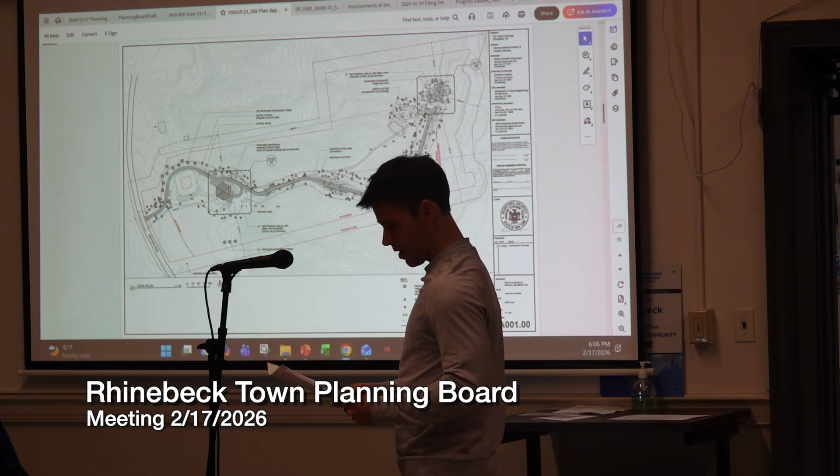So the well's already been drilled, and it provides a very significant amount of water, so we're good there. The back of the property — this is the well, yeah, there's the well.

We're proposing an accessory dwelling unit at the rear portion of the property, close to the Landsman Kill, which borders the east side of the property. It's a New York State DEC Class C stream. There's a 100-foot conservation easement from the bank, and all disturbance and construction is staying completely outside of that easement. We're getting pretty close to it. The point is there's a waterfall in the stream that we're kind of capturing the views with, that's the intention.

So we've already submitted a letter from a structural engineer verifying that the existing foundation was good. So we looked at that. Just looking at what else.

So the project complies with maximum allowable coverage. We do have to get a variance from the ZBA for the size of the accessory dwelling unit. We've already met with them. It was pretty positive. Public hearing is tomorrow, I believe. So that is in the works.

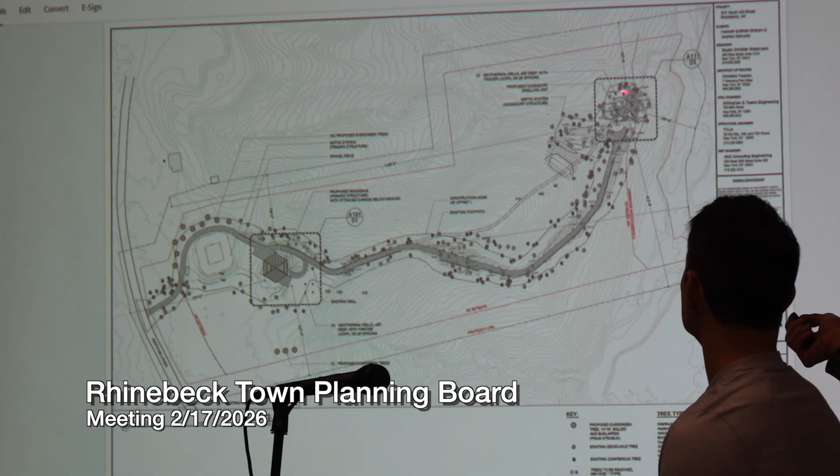The site is staked out now. I think they're going to take a look. I refreshed the flags. Most of the sticks from last summer were still in it, but I put some more yellow ribbons so it's more visible. I have photos also in case you want those.

There's a pretty visible ledge actually, like almost like a little cliff. So we're above that cliff, which is also the 100-foot setback, and so we're 3 foot 9 inches further back from that, from the 100-foot setback. From the easement.

This parcel was created as a filed map, and as such, there was a driveway shown on that map, which is where the existing driveway is. We're going to meet with the county DPW, though, just to make sure everything's good. We already discussed with him, we just can't get out there with this weather.

So getting the driveway back, there's a driveway from basically the primary dwelling back to where the accessory dwelling is. There's some steep slopes there. The majority of it is about 10%.

There's a driveway profile that was submitted. There is a section about 100 feet where it approaches 15%. It's 14.7. But we're proposing, so we'd like to keep it gravel for aesthetic purposes, but we're proposing the geocell stabilization.

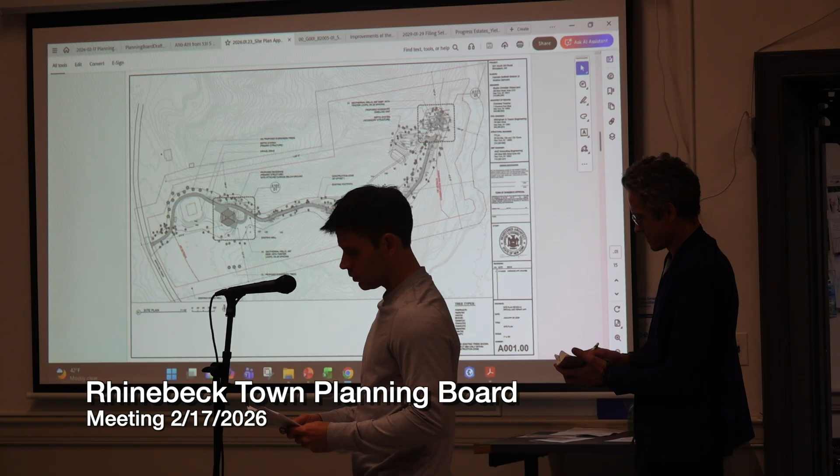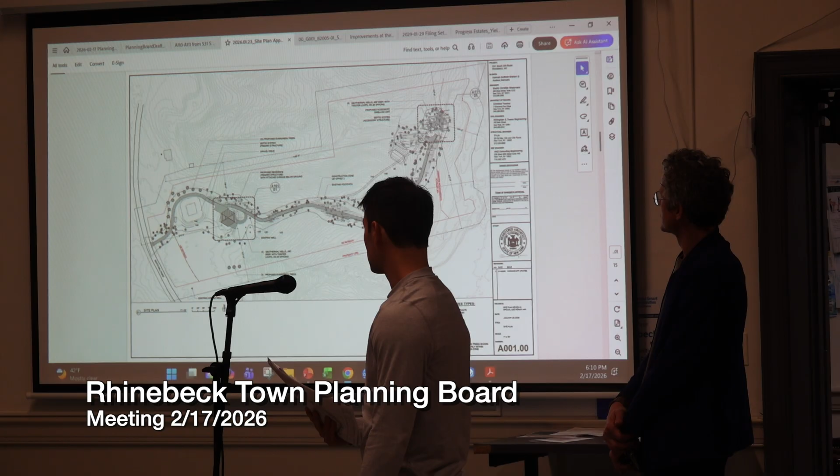There's more information in the civil plans. We're going to try to keep all the road adjacent ditches vegetated as much as possible, just to allow natural infiltration into the ground. The fire inspector has taken a look at the plan, and he was okay with it. So we've got email correspondence. I think that was included.

Was it the fire inspector or the fire department? I think it was the fire inspector. I'd have to look at who it came from.

Where was I? So the primary structure is over 300 feet from the public right-of-way, 140 feet from the boundary line to the north. Most of the tree clearing was already done when the original home was built for the front portion. We did conduct a tree survey within 20 feet of the limits of disturbance, so we could wiggle it around if we needed to avoid any specimen trees.

This plan and another plan does show tree removal. There's actually a lot of dead trees that are being removed. If you look, all the trees are labeled with their diameters.

And we're proposing new ones. We're proposing some additional landscaping just to kind of buffer what's already there. So the ADU certainly won't be visible by anyone. It's about 1,300 feet from the public right of way. It's pretty well screened.

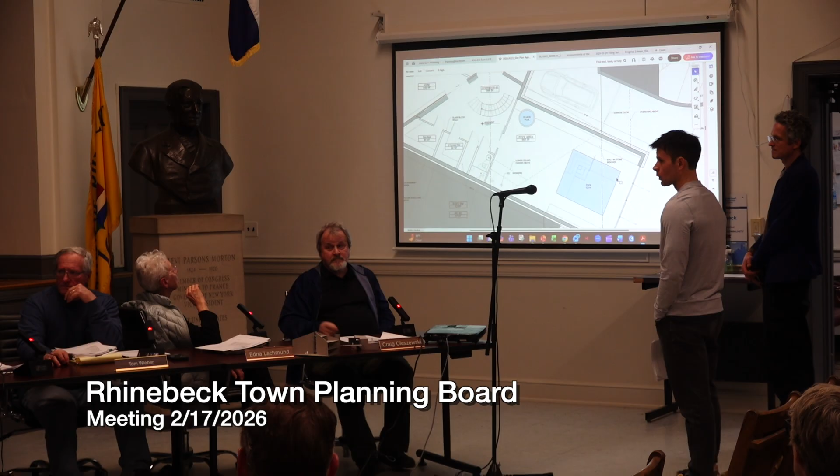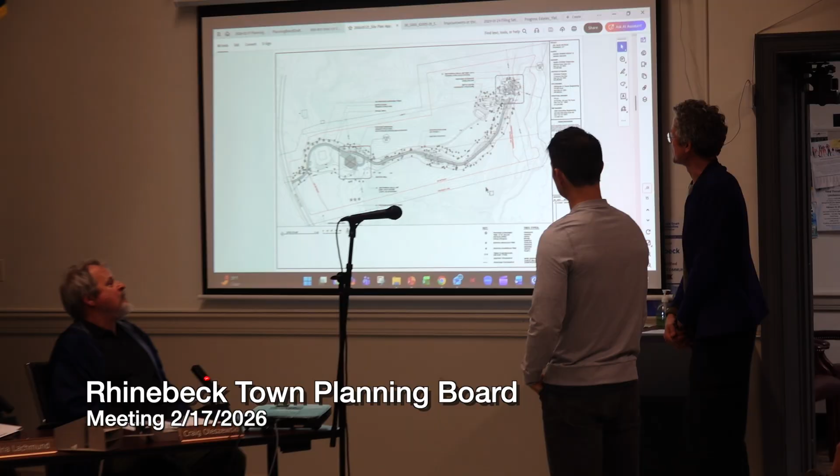Plus the primary bedroom is in the accessory dwelling. Yep, so presumably they will take a car from time to time to get there, every once in a while, yes. When we started walking the land, we were actually talking about just using this path, but then we knew we needed to make a road that's drivable for a fire truck. And the accessory structure is just bedrooms, bathroom, and like a living space?

A little kitchenette, yes, upstairs. So in what here looks like a pavilion, there's a kitchen facing the waterfall, and a built-in table, and then the roof deck is accessible. Actually, this addition to the building will house the bathrooms.

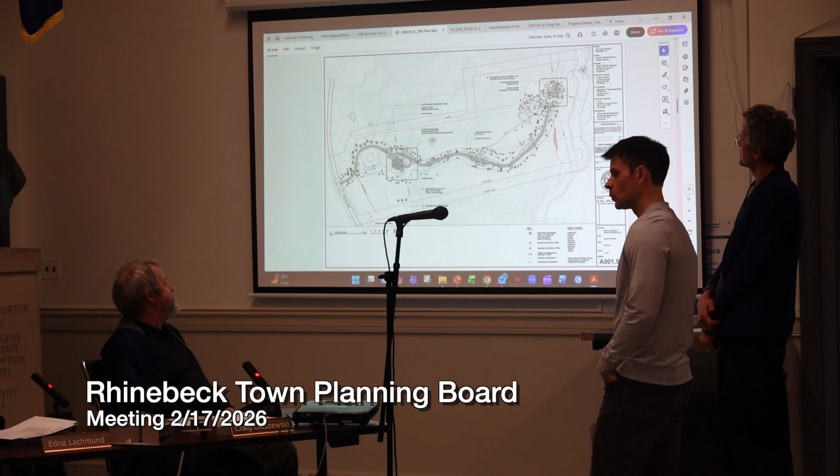Since this is in the landmark district, we'll be requiring a phase 1A and 1B archaeology. It may have been done for the original house design, we should check into that, but it certainly was not done for the roadway or the accessory dwelling. As that gets closer to the Landsman Kill, which is a very sensitive site, which is why Scenic Hudson has it, we'll especially want to have a concentration on archaeology in that area.

Would you agree, Craig? I do, yeah. That's a good point.

Anything else? You mentioned that the accessory dwelling is close to the edge of the ledge. Do you anticipate any difficulties during construction? How will you keep debris from falling down that ledge? We're set back 3 foot 9 inches from the actual ledge, which coincides with the setback, the conservation easement. So those 3 foot 9, we're pretty sure we can stay within it, because we don't do much excavation. We're pretty much on bedrock, so the footing will go directly on bedrock. It's a slab that we're pouring there, and then it naturally steps up to this side here.

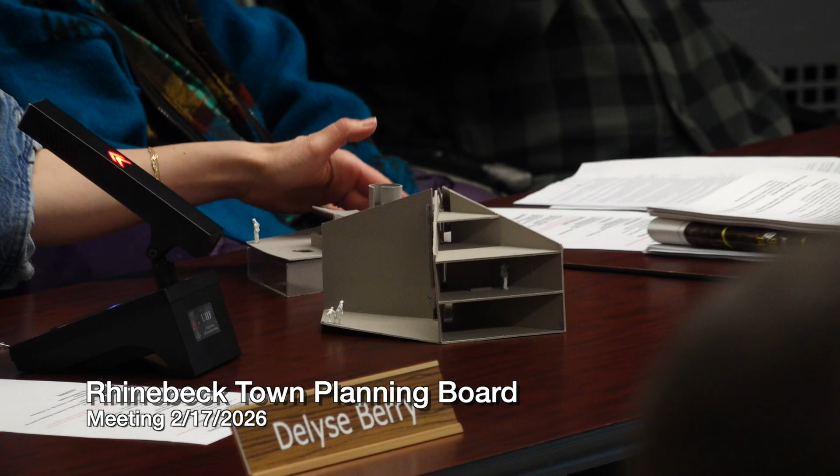We just have to expand it a little bit. But not in size, I think we used different pipes. Well, we use a different type of system, so it could be potentially smaller, but it still has to be expanded a little bit. So it's kind of a little bit of both. And then the small set we built down here and the reserve, so we don't pump the wastewater up here. It's good for the fresh water going down, but the septic is...

Anyone else? Jim, do we have a draft procedural resolution?

Draft procedural resolution for the board's consideration for the application by Ethan Samuels and Gottlieb Graham for site plan special use permit under Town Code Chapter 125, for construction of a principal residence, accessory dwelling unit, and associated elements at 531 South Mill Road within the RA10 zoning district. Asking the board to accept the application and supporting documents as adequate for further review, classifying the action as Type 2 under SEQRA, for which coordinated environmental quality review is not required.

We will schedule the public hearing for the application for March 16th, no earlier than 6:05 p.m.

We'll send this to the CAC, the WAC, and HAPAC for review, and need at least 2 planning board members to do a site visit. I'll go. There'll be some Sharon. Is anyone else interested? Would you like to be notified when they schedule? I'd like to. Okay, so I want you to schedule, you'll just send it out to everybody else.

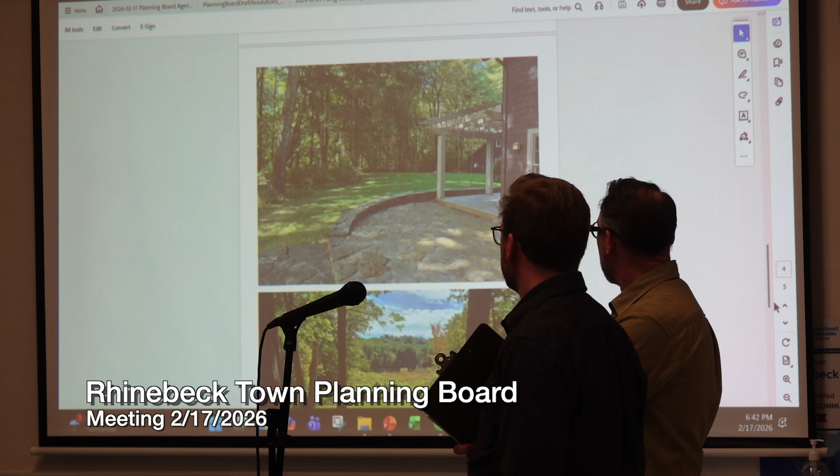Basically, that sunroom isn't staying exactly as is—it'll come around inside the house, using a ton of windows. The disturbance seems quite minimal because it's already been disturbed, not like new disturbance in a lot of ways. It just makes sense what they're doing. It's really a beautiful piece of property, set back so you can't really see your neighbors from there. There's a path on the left side of the house down to the lake where they can kayak.

During the site visit, I mentioned something about storage potentially for the canoe and kayaks. Was that ever rectified? Yeah, we're not proposing storage. They do kayak and canoe on the property, but we're not proposing any storage for that.

I think it's very quiet, hidden back in the woods. You really can't see it from anywhere except maybe if you're out on the lake, and if you are out on the lake, I'd say the first 200 feet is vegetation you couldn't even get a boat into. So it's very nice.

Planning board members, any questions or comments?

Well, what's the capacity of the spa, and is it going to get drained on a regular basis? Well, they have a family member who will be using it for therapeutic reasons, so we were thinking with that one person in mind, potentially four people, I would say. But I'm not sure about it.

Is it seasonal or year-round? I think it's on here, right? Okay. So I guess Craig was trying to get at—is it going to be drained in winter? Are you going to be pumping chlorinated water into Sepasco Lake? Yeah, I think it would be salt water.

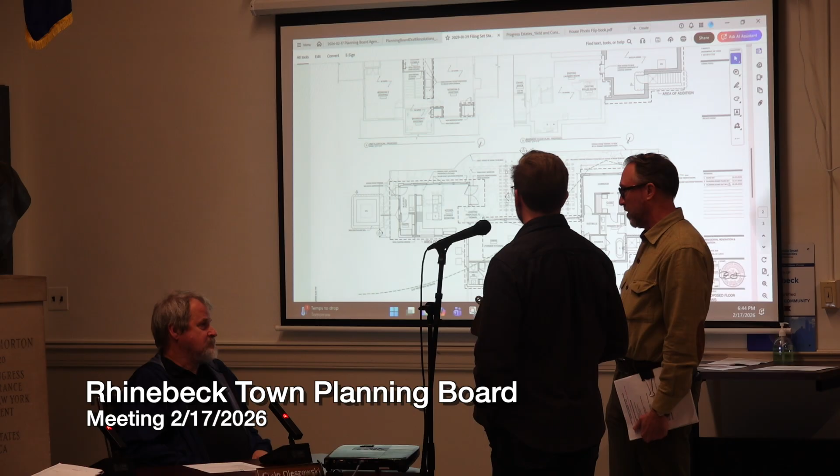The other concern is soap—it's pretty far away, but you don't want soap getting into the lake. Also, with rainwater going into the septic system, it could overwhelm it. Absolutely, yeah, so we'll talk to them about that.

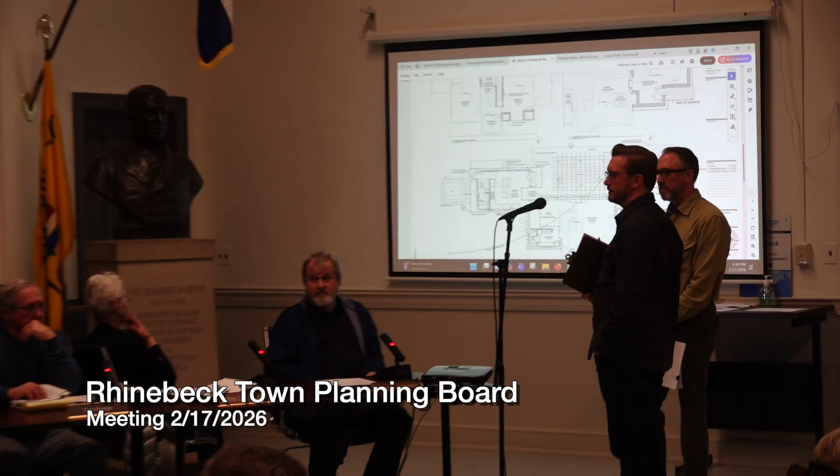Anyone else? Is there anyone here from the public wishing to comment on this application?

If not, we still have some loose ends. We're waiting on DOH approval and DEC approval, as far as we stand. I know we'd like it to be fast. What's your expectation? Would you like to go out 1 month, or do you think you need 2 months to have this done?

What we've told the owners is they weren't going to go into working drawings until we got an indication that this was approvable. And now that we have to wait for DEC and the county health department, I think it's fairly certain we can work out a plan with the county health department. So we've got maybe 3 months of working drawings to do. We can come back either next month or when we have the information.

Well, why don't we compromise and go out 2 months? Which gives you a little more time, but still gets you in pretty quickly. Does that work for you and your client? Yes, I guess just a question - as far as getting approval, you need a full Department of Health and a full DEC approval, not just potential.

We've been told about 3 to 6 months will be required for either one of those. Sadly, yeah. We've only had, I think, one application where DEC took jurisdiction that's actually gone through the whole process with us, and it did end up making someone move their proposed accessory structure.

The board can't approve a plan until we know exactly where things are going to be. So if the DEC comes back and says you have to move something or change something, we have to wait until we're confident that your plans are final. And I don't know how long that will take.

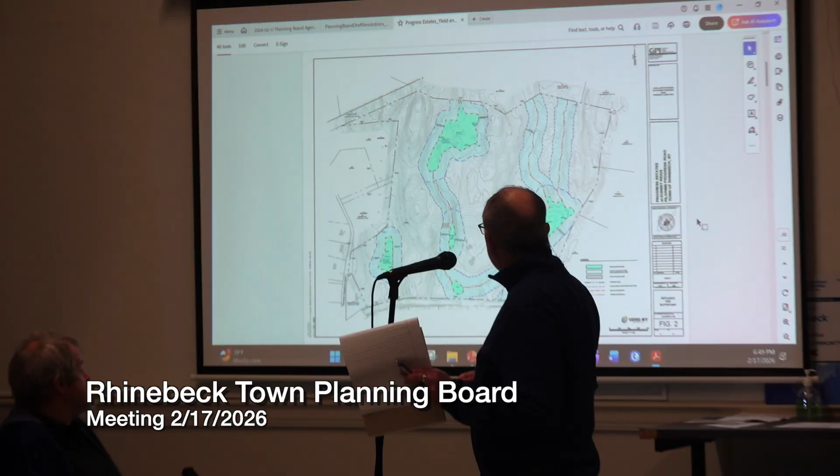So the next slide, please. This is what results from utilizing those constraints on those first two maps, and then bringing in the regulations that apply to a regular subdivision, things like private roads, which we've got two of on this, and then the minimum lot sizes, minimum required road frontages, and maximum road slopes.

A little hard for probably anybody to see from where you are, but all that is on this plan. The rectangles pointing to a whole bunch of places along the road represent elevations to show that we're not exceeding any allowable slopes. This also shows that the lot layout and configurations meet the lot sizes and road frontage requirements, and that we're keeping away from the required slopes for the yield subdivision plan.

So what this plan shows us is that, including keeping the existing home that's on the site now as a new lot as part of the total, we would be allowed to have 11 lots on this site per traditional subdivision regulations. So then that is taken forward into the conservation subdivision plan process, and that has a bunch of plans with it, so I'll go through these quickly.

Next plan, this is one we got to do, probably. Yeah, Mike, it doesn't like this plan, I'm sorry, this is yours. I do have the hard copy, the full-size print, if I would want to put that on the easel, or? We'll just, I mean, you had this laid out. Yeah, I don't know why.

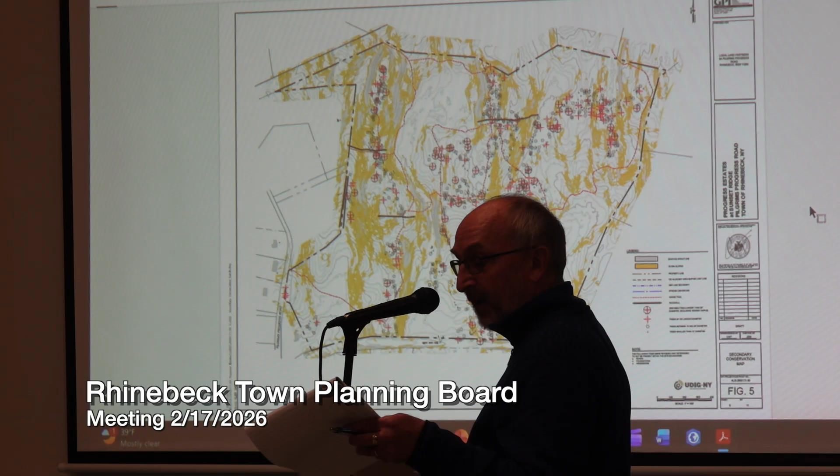So this first one is kind of like part A, and that one shows the slopes that are from 15 to 25%. It shows the existing horse trails, which are the red dashed lines on there. The yellow pointers — I brought you batteries this time too. So this one will take planes down if you're not careful.

So the red dashed lines through here represent the existing horse trails that are on site now. The yellow is the 15 to 25% slopes. Rock walls are these kind of darker black lines that you see periodically. There weren't a lot, but there are a handful of them. The purpose of showing these, and subsequent maps later you'll see, is that we worked out a plan that preserves these things and designs around them.

Also part of this process, in all of those circles you're seeing on there, there are large, different size circles, some with pluses in them. Those represent all the trees on the site that are 6-inch diameter caliper and above.

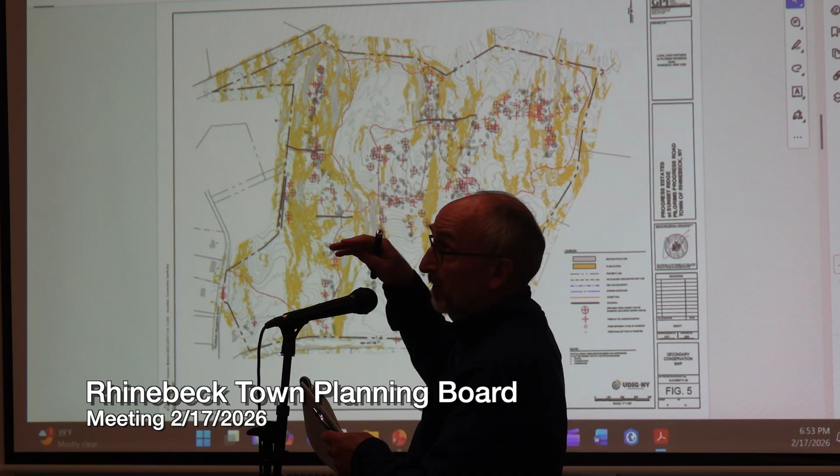We broke them down a little bit further into size classifications: 6-inch to 12, 13 to 24, 24 to 36, and then the big ones like 50-inch caliper trees. That helped inform the design to ensure we work around everything as able, making sure we're not taking down a big 50-inch sycamore or anything like that.

Okay, this plan is kind of key for the whole process. This one shows the soils on the site. Over here gets into the typical soil classifications from the county maps, and this piece gets into more information taken from the LaBella, now used to be Chazen, report prepared in 2006, that's referenced in your code.

That is what's required to be part of the process for developing a conservation plan. And why that's crucial is because that report and soil-related information tells you what the minimum lot sizes need to be based on soils, ensuring adequate space for septic systems, wells, separation from each other, so you're not trying to squeeze something into too small an area that's never going to work.

With the soil types, we actually have 3 main soil types on the site. Back to where you zoomed into that was perfect. Sorry about that, was good.

So the 3 soil types on this site: B soils, C/D soils, and D soils. It's just like school, the worst, you don't want to go down farther in the alphabet. So the D's and the C/D's are not as good as B soils. The worse the soils, the bigger your lot size has to be to allow adequate space for infiltration from the septic system, proper separation distances for wells, things like that.

So you can see on here, the recommended minimum lot size for a D soil from that Chazen report is 6.2 acres. The recommended minimum size for C/D's is 3.5, and for B's, the really good soils, you can go down to 1.9. So you've got a mixed bag of soil types on the site, and this is a big part of what led to how we came up with the design on the site.

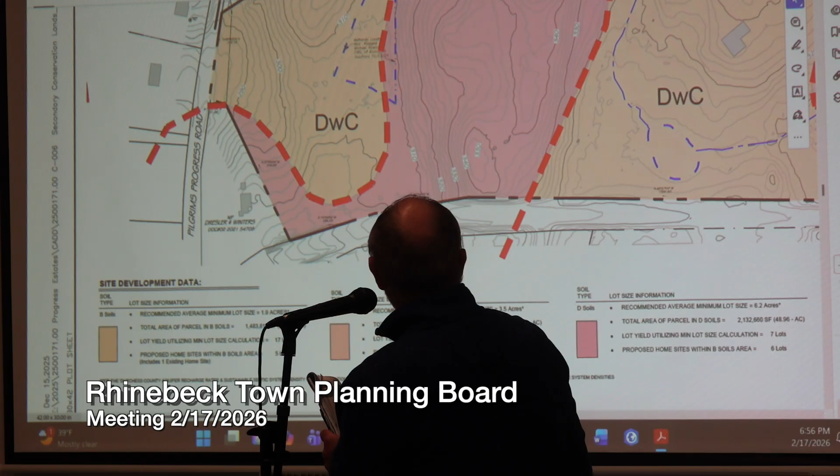Go to the next one, please. It's probably going to stay zoomed in on here, I guess. Can you go back so we can understand where they are here? Thanks. So basically you've got what's labeled DWB and DWC, those are, and over here a little bit too, your better soils. This big swath through here and through here are your less quality soils.

It makes sense that if you overlay this on top of the wetlands map, you'll see they coincide pretty well. And the minimum lot size for the B soils was what? 1.9. I see, thank you.

So this map is what's called a potential development area map. This utilizes all the information from those previous maps, combines it so you start backing yourself down into, from all that information, what am I left with on the site that's realistically developable? That's represented in this neon greenish yellow color. We left everything that showed itself, even though something like this here isn't going to be practical, just to show that technically it's realistic.

Go to the next one. From here to the next step, there's a three-step process for 3 maps. It's the sequence Tom likes to see within the code for how you start laying additional information on top of that. It starts with the house locations being sited, represented by all the red rectangles, so you can see how you best fit the houses within the potential development areas. Next slide, please.

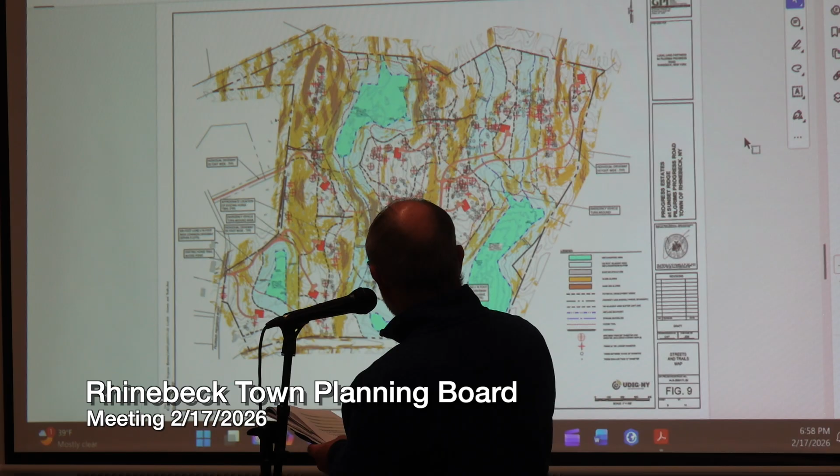From there, you lay in the roads and driveways. For this conservation subdivision, we switched from the private roads in the yield plan over to shared driveways. The conservation code allows that, because it allows for a much lighter impact on the site with narrower widths, you can bring 6 home sites off a single common driveway entrance. This side brings it into 6, including the existing house. On the other side, we're bringing in 1 here and 1 here for a total of 4 on that side.

And this basically is just a composite of all that information together to become the conservation subdivision plan itself. This is very similar to why we broke out the secondary constraint maps into two, because it looks like this and it's a little bit harder to understand.

This one, after we laid out everything, got the roads in, got the driveways, got the houses, got the lot layout, worked with all the constraints, then we worked out the open space conservation areas. For this zone and the conservation subdivision regulations, we're required to preserve 65% of the site in open space. Being a 102-acre site, we're a little over 65 acres of what you're seeing here in the blue.

We laid this out in a way that keeps it as contiguous as possible for habitat, for animal movement, pattern requirements, things like that, so that we're not segmenting this into ten different tiny pockets of open space. We're trying to keep it all as cohesive as it can be. Really the only things that are bisecting it are areas where we've got driveway crossings, which is here, here, and through here. The rest of this stays contiguous.

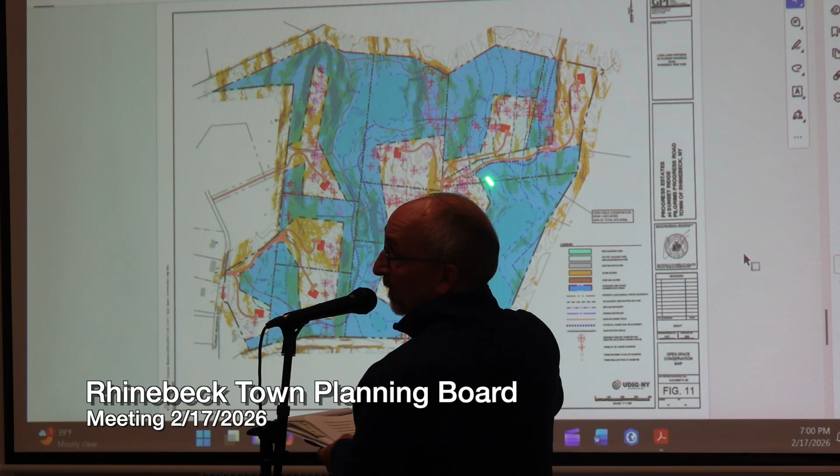In fact, this whole site over here is all contiguous. And this site is another large parcel that for all intents and purposes will be contiguous, because no one's going to stop at the driveway and say, darn, I wish I could get to the other side.

Next one, please. Last map is basically just a clean version. I think Gretchen had a request that, for the reasons I've explained on previous maps, it gets a little hard to follow. So this is just a stripped down version of that conservation subdivision plan with just lot lines, driveways, and the topo and the home sites, just to keep it clean. That's pretty much where we're at.

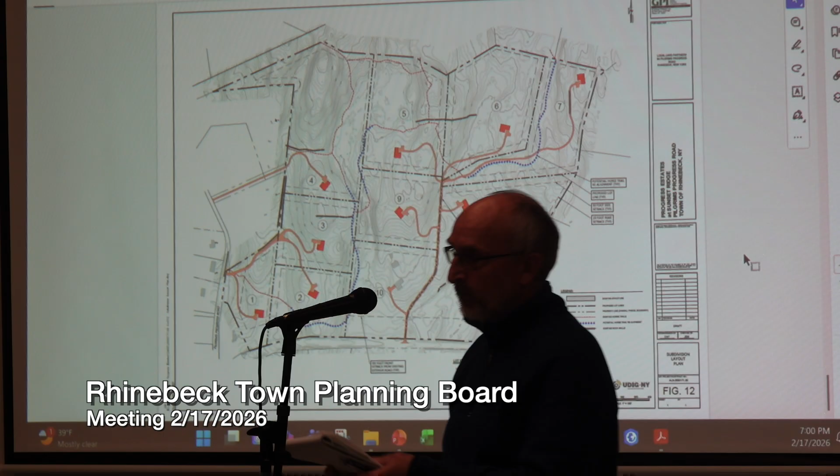One of my first questions is, you're showing the area in blue that's conserved and then this other area around each of the houses. Does that mean that all of these areas will be cleared, or is this just the potential building area? I don't think we see areas that are proposed for clearing.

No, those are just—basically, if it's not blue, it's potential development area, but it doesn't mean that everything gets cut down in those areas. We've worked, and you can see on here, that all those trees from that original map are all still there. That's why you're seeing things like these driveways sneaking around like that. In addition to grade requirements—between the grades and the trees—we're minimizing impacts and avoiding trees.

So you could be establishing tighter development areas for the houses, could you not? That's why I wanted to make sure I stressed how important it was on that previous map with the soils from the Chazen report that get into the recommended minimum lot sizes, because that's exactly what drove that layout you're seeing. It's within the soil classifications and the three different soil zones that you're seeing on the site.

And then once we started figuring out between topo, trees, wetlands, buffers, all those constraints you've got to work with—and the client wants to be gentle on the site and wants to develop this in a conscientious manner—once you start putting that all together, it kind of starts telling you what it wants to be. It's not an arbitrary 'let's just try this and see if they'll go for it.' So that's what drove it.

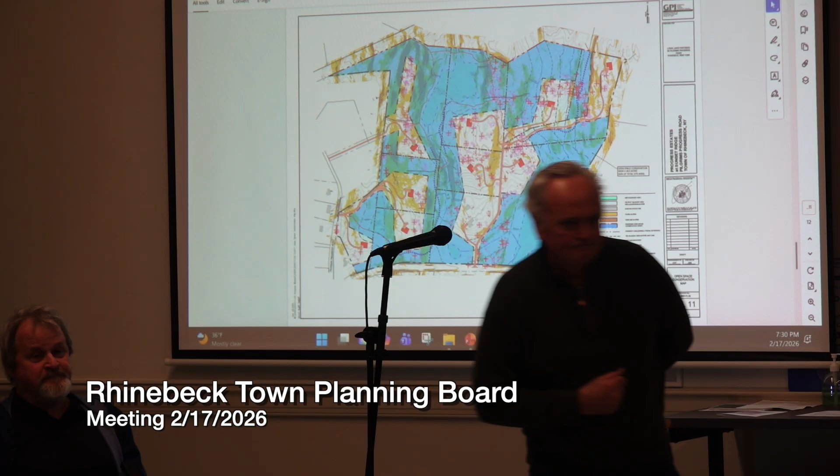Good evening. My name is Stuart Findlay. I'm representing the Landsman Kill Trail Association, and we use the horse trails that have been alluded to a couple of times. Landsman Kill has been an active horseback riding outdoor recreation operation in the town of Rhinebeck for 58 years now, I believe.

Once or twice a year, we actually use town property for some of our events, and this gets approved by the board, et cetera. I think the willingness of the landowner to maintain these trails and provide access is obviously beneficial to us, but there are other benefits I want to point out.

This kind of outdoor use of the land, visible recreation, is good for the rural nature of the town. Typically people driving by or walking on the roads see us going through a field, they'll stop, and the kids want to pet the horses. They appreciate seeing this kind of traditional use of the land by this type of recreation.

There's also a local economic benefit. Most of what you need to support a backyard horse comes locally - your hay bales, your fence board, your farrier, the vet. For myself, for instance, it's Rhinebeck Equine. It all comes locally. That supports the kind of businesses that contribute to the rural nature of the town and maintain some of the traditions of the town.

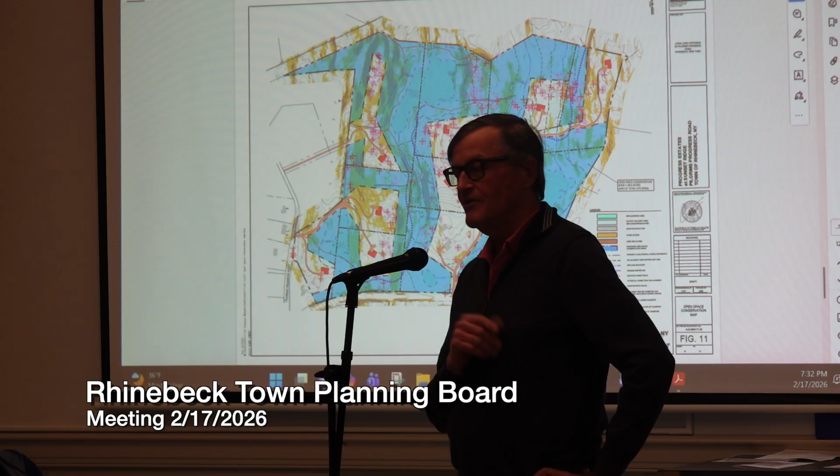And I'd like to see this kind of use and the cooperation of the landowner let us keep going. Thank you.

Hello, my name is Jay Burgess. I'm joined by my wife Thea. We live at 25 Pilgrim's Progress Road, so we're directly across from a part of the parcel. I'd like to begin by commending the planning board and the applicant for the obvious time, effort, and consideration that have gone into the planning documents to this stage. I feel very confident that at the end of the process a very fine project will result.

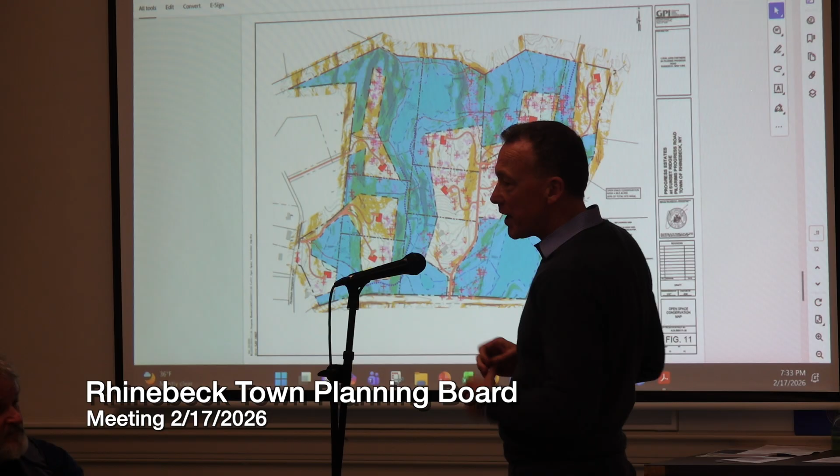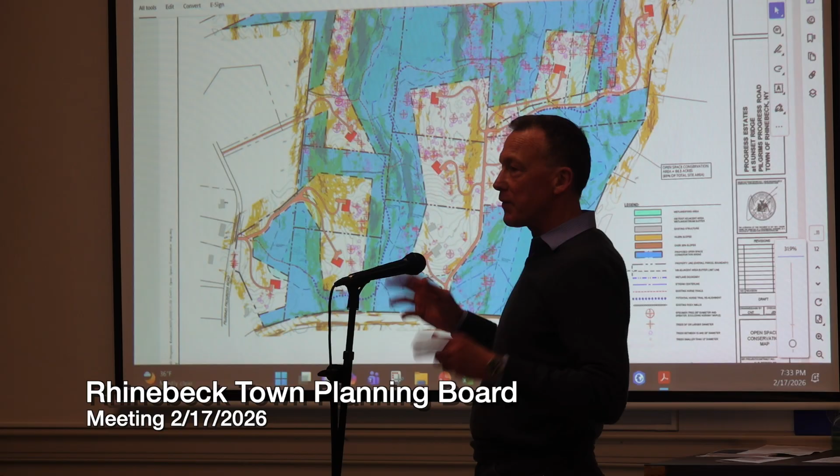One very slight item we might ask for consideration. Our house appears, from what's sketched out here, to be directly across the street from one of the combined driveways that would serve - I think it's right here. I understand the rationale and the benefits of the combined driveway, but it would necessarily, by dealing with traffic from 3 different households, have a little bit more traffic come through it. There's a bit of elevation there, kind of on the same level as our home, so there might be a possibility that in the evenings headlights from cars coming through would shine directly into our house.

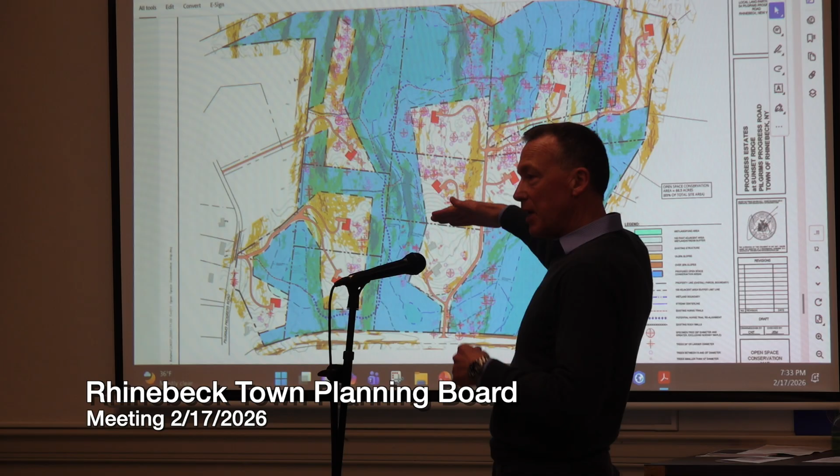If that could be shifted very modestly toward 308, it could come out between our house at 25 and the neighbor at 17, and the lights wouldn't be directed at either house. I know there's a lot that's gone into mapping exactly where everything is and balancing things, but if that shift could be considered, that would be very nice.

And then last, we do value our well, so we appreciate the attention going into maintaining its viability for us and the existing homes. I also want to add that we really value the rural nature that's in part reflected by the horse trails that go through, so I'm glad to hear that in the proposal as well. That's it, thank you.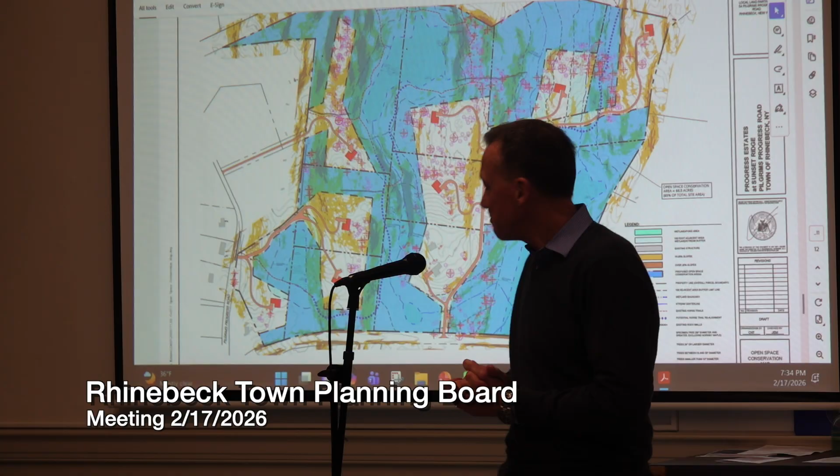My name is Roger Smith. I've seen many of you before. I live at 437 Route 308, and we actually have a 7-stall horse barn on our property, and while we don't own horses currently, having access to the trails is obviously important.

I've been volunteering my time to clear most of these trails over the last 3 or 4 years, so I know the property very well. And I would also echo what others have said, that the applicant has been very transparent and very engaging when it comes to his aspirations as a member of our neighborhood.

He does want this to be a very acceptable project for the neighborhood, and he's expressed support for the horse trails, which I think is terrific. And in thinking of the world of real estate developers and how that can go one way or the other, he certainly has taken a very positive approach.

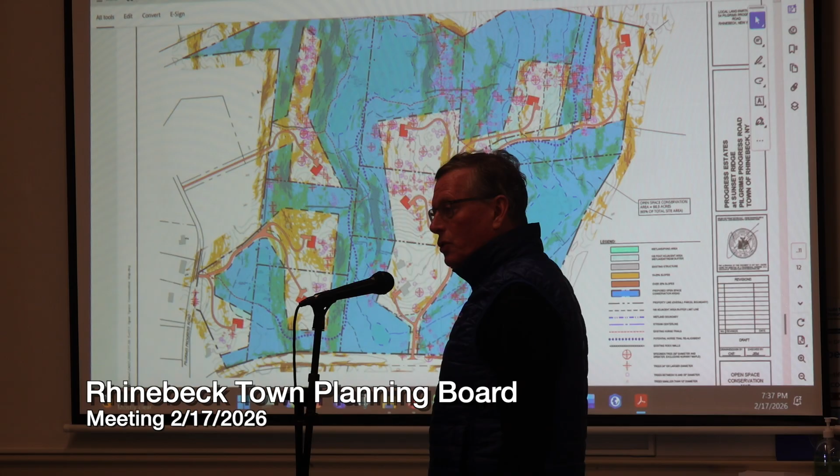The one concern I've brought up with him that I wanted to share this evening is the horse trails will go over these new lots with new owners. If there is not an easement as part of the subdivision, and I believe there may be a homeowners association, then each time property changes hands, it will require the organization to seek approval for passage of horses over the trails. And if any one landowner decides they don't want the horse trails anymore, it's likely at least some portions could be shut down completely. So my request and hope is that there are easements as part of the subdivision so the horse trails can persist even if future owners decide they don't like them.

Thank you very much for your time this evening and for all the time and effort you put into this organization. It's a terrific asset for the community and certainly helped our property as we were restoring it. Thank you.

Anyone else? I can refer to CPL. Yep, I'll revert to CPL with the specific questions that were raised, ask Chris to get back to us on that, and continue the discussion of the yield plan and any other preliminary questions you have.

So we will be continuing the public hearing, which is about one month out. That works? Okay, March 16th. So that's March 16th. May I have a motion? So moved. Motion and second? Second. All those in favor? Aye. Opposed, abstention, motion carries.

That concludes the regular order of business for this evening. So unless there is something else, I could entertain a motion to adjourn. Oh, I'm sorry, it wasn't on my agenda. Sorry, we didn't say that.